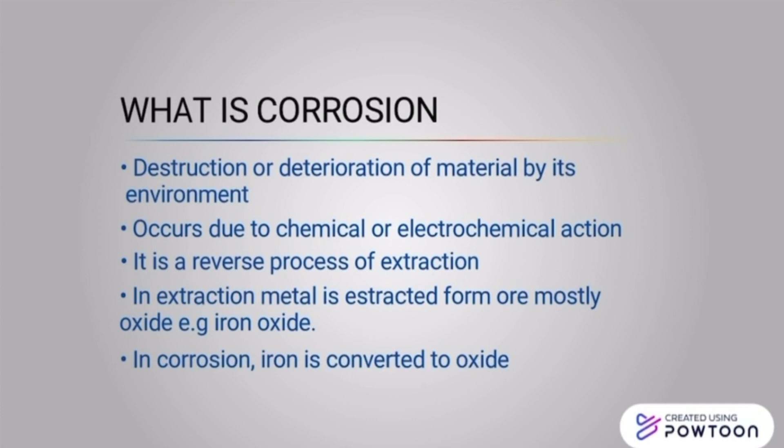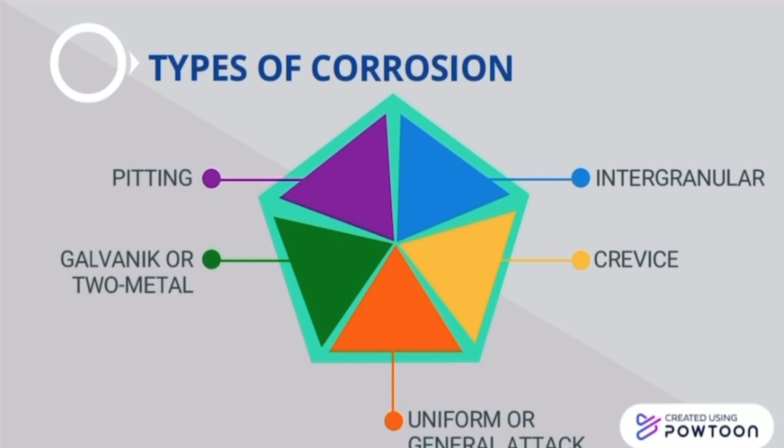Corrosion has 10 types: pitting, galvanic or two-metal, uniform or general attack, crevice, intergranular, cavitation, fretting, selective leaching or dealloying, erosion, and stress corrosion.

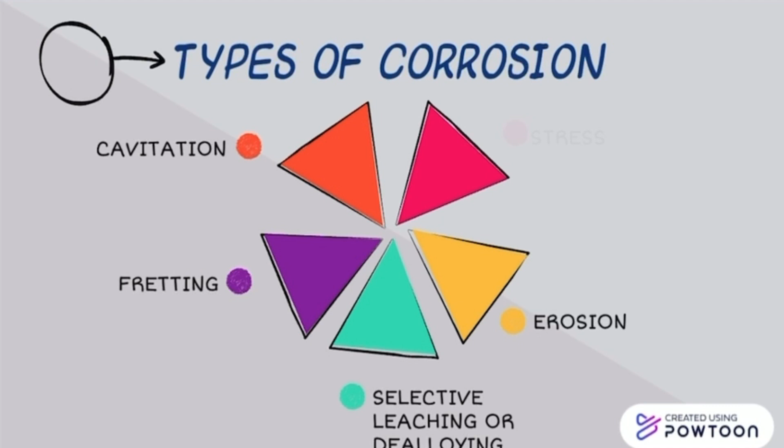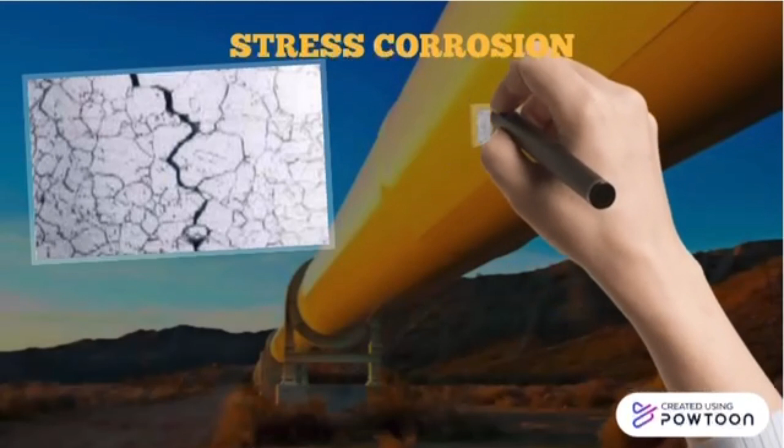Now we move to the main topic. What means stress corrosion? Here are the examples of stress corrosion.

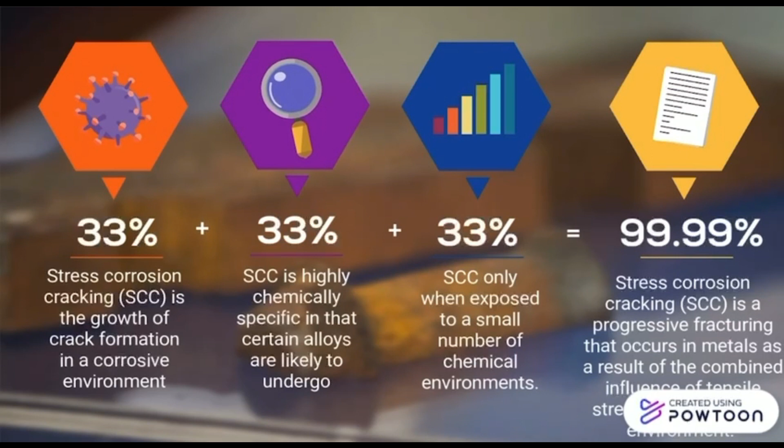Stress corrosion cracking is a growth of crack formation in a corrosive environment. It is highly chemical-specific; certain alloys are likely to undergo stress corrosion cracking when exposed to a small number of chemical environments. This makes stress corrosion cracking a progressive fracturing that occurs in metals as a result of the combined influence of tensile stress and a corrosive environment.

These are the elements of stress corrosion cracking: environment, material, and stress. In environment, we have aqueous corrosion and high temperature oxidation. In material, we have fracture fatigue. In stress, we can see stress-induced adsorption, surface energy effects, and nanomechanics. These are the three elements for making stress corrosion cracking.

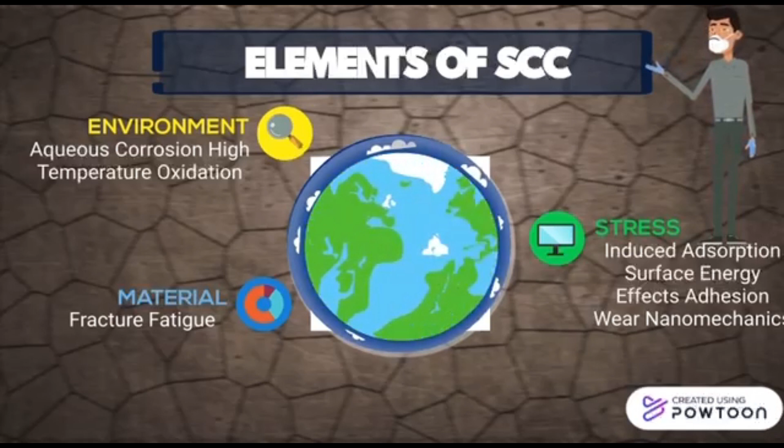Stress corrosion happens due to three factors: the first is tensile stress, the second is a localized zone that is chemically active, and the last is formation of crack and propagation.

Stress corrosion occurs due to tensile stress, applied stress and residual stress on the susceptible material in the presence of a specific corrosive environment, resulting in the formation of a crack which propagates. Stress corrosion cracking is a failure mechanism caused by environment, susceptible material, and tensile stress. Temperature is a significant environmental factor affecting cracking.

There are three common features of stress corrosion cracking related to our daily life. First, failure of metal resulting from joint action of stress and chemical attack. Second, initiation and propagation of a crack without any outside evidence of corrosion. Third, sudden and unpredictable failure, such as a catastrophic failure on a ship.

Causes of SCC. There are three main causes of SCC. First, susceptible material. Stress corrosion cracking can be caused by the type of material being used, because different materials are more or less susceptible to stress corrosion cracking than others. Poor material selection can lead to SCC due to the material being susceptible to it in the corrosive environment that it is operating in.

Second, corrosion environment. The service environment that the material is operating within can contain chemical species which cause stress corrosion cracking to occur in different materials. As a rule, material and environment selection should be considered together to avoid stress corrosion cracking.

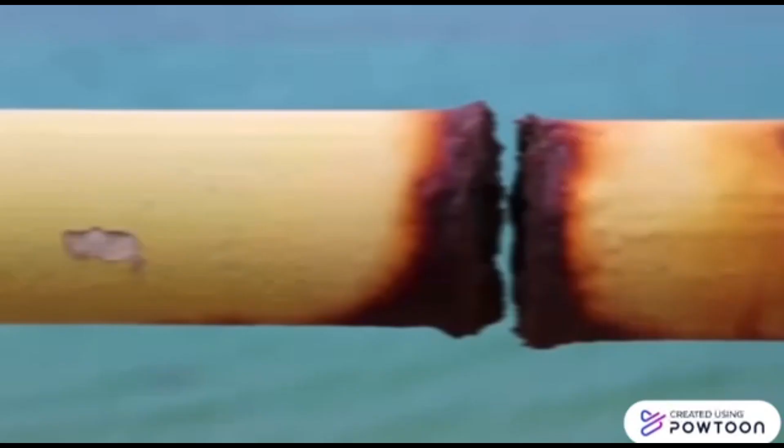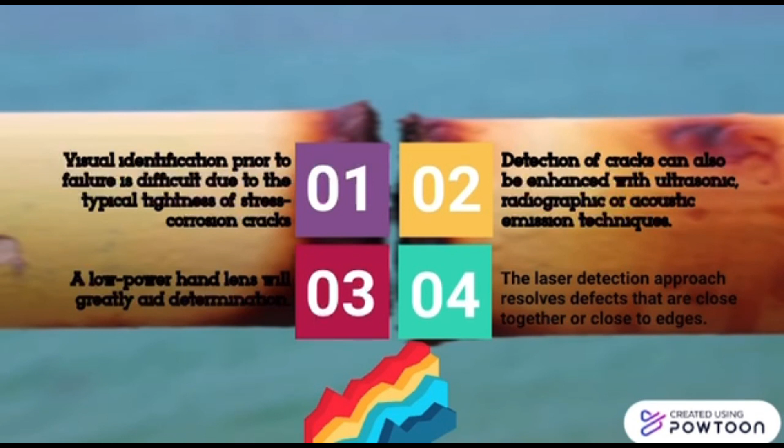How to identify SCC? Visual identification prior to failure is difficult due to the typical tightness of the stress corrosion crack. A low power hand lens will greatly aid determination. Detection of the crack can also be enhanced with ultrasonic, radiographic or acoustic emission technique.

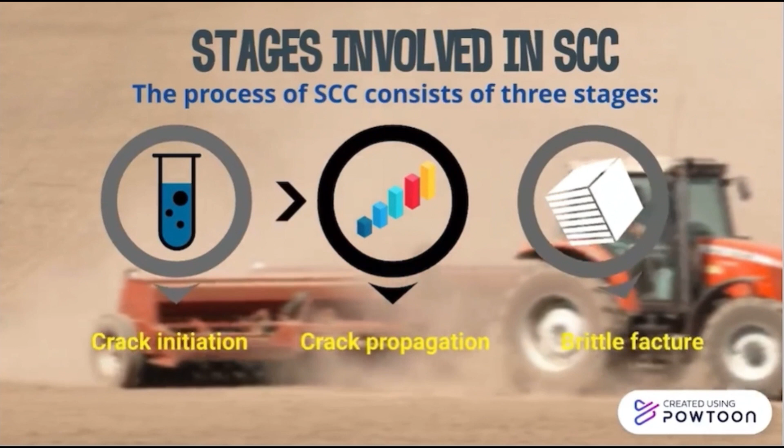Stress corrosion cracking is a delayed failure process. Cracks initiate and propagate at a slow rate until the stresses in the remaining ligament of metal exceed the fracture strength. The sequence of events involved in the SCC process is usually divided into three stages: crack initiation, crack propagation, and brittle fracture.

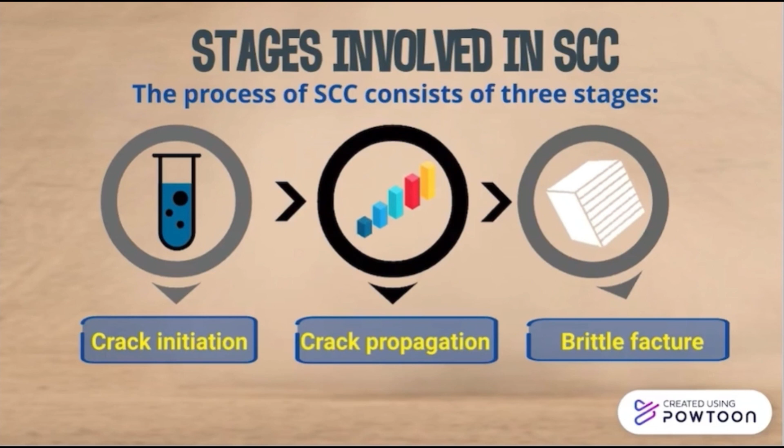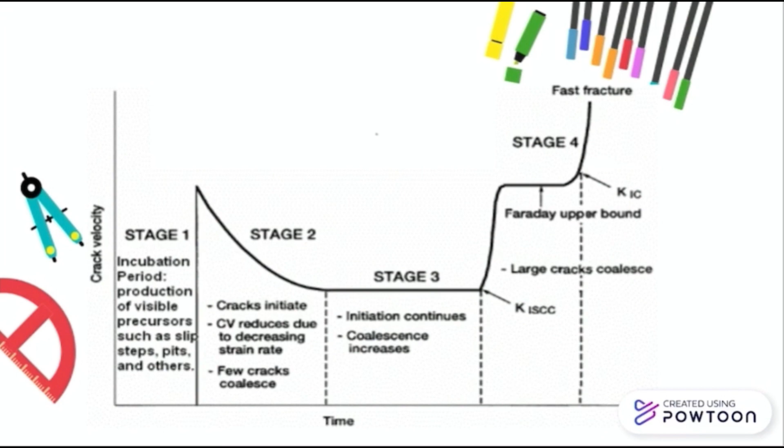Mechanism of stress corrosion cracking. The first one is the adsorption model. Specific chemical species adsorb on the crack surface and lower the fracture stress.

The next one is film rupture and pre-existing active path model. And the last one is embrittlement model.

It's like hydrogen embrittlement. Hydrogen is a special case because it's a small molecule, as we all know. So it dissolves in almost all metals, and most of all it can easily diffuse between the metal atoms in the crystal lattice.

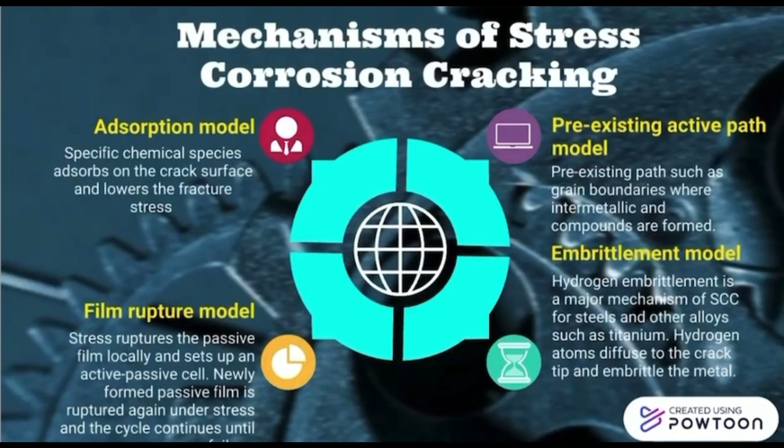Mechanism of stress corrosion cracking: pre-existing active path mechanism. Active path failure due to stress corrosion cracking is characterized by the progression of corrosion along an intergranular path of least resistance with high concentration of tensile stress. You can see the grain boundary and strain generate.

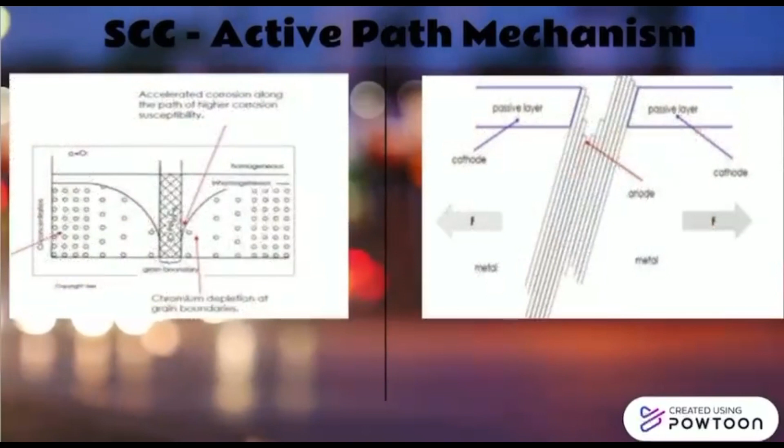For grain boundary precipitation, consequently, a form of galvanic corrosion can occur whereby the grain boundary corrodes while the specimen surface and crack walls remain passive. This process can occur in the absence of stress, giving rise to intergranular corrosion that is uniformly distributed over the specimen. The effect of applied stress is probably mainly to open up the cracks, allowing easy diffusion of corrosion products away from the crack tip and allowing the crack tip to corrode faster.

Strain generated active path mechanism. Strain is like a controlling influence, and strain generates it.

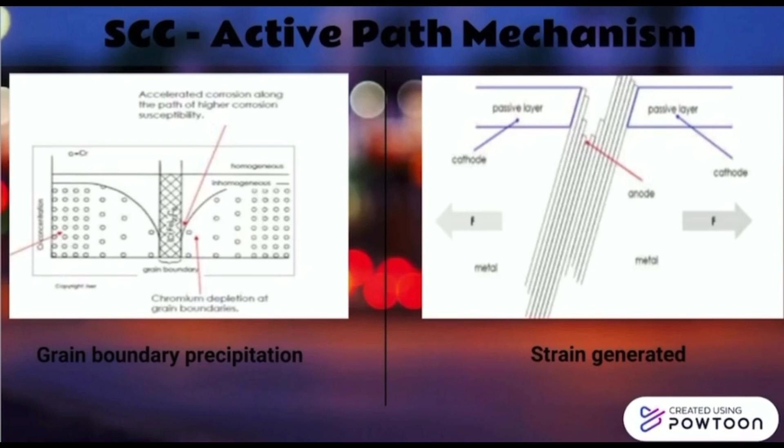Initially, a passivating film is formed on the metal surface. The film is ruptured by plastic strain, exposing bare metal. This film will form again and continue the process, making the crack propagate by successive dissolution at the crack tip. Emergence of slip steps is also considered to cause film rupture.

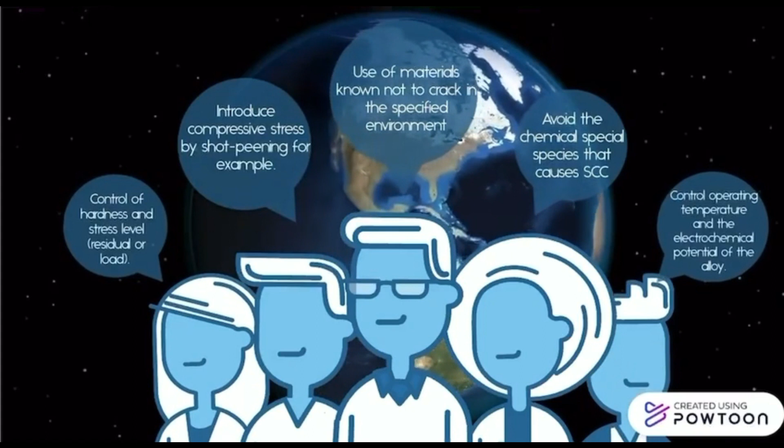First of all, prevention of stress corrosion cracking: introduce compressive stress by shot peening, for example. Use materials known not to crack in the specified environment. Avoid the chemical species that cause SCC.

Next, control the operating temperature and the electrochemical potential of the alloy. Control hardness and stress level, residual or load.

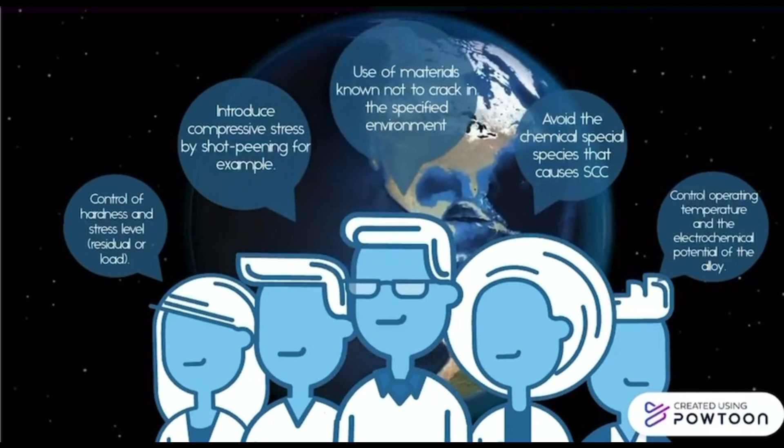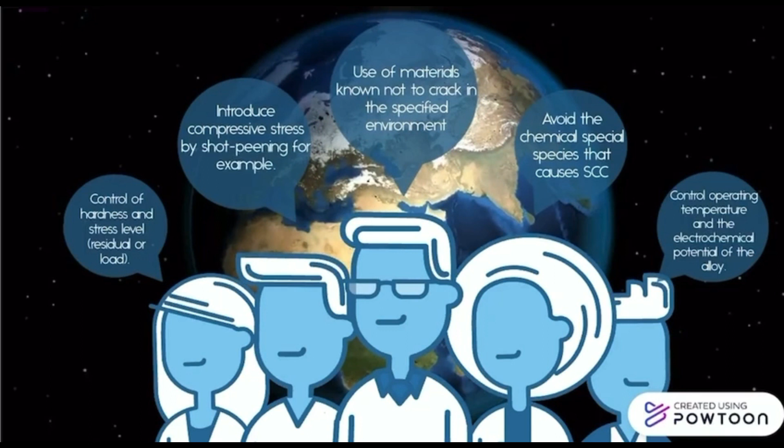Next, material: one of the main prevention methods involves using a non-susceptible material. This is an important way of controlling SCC as it prevents this form of corrosion from occurring in the service environment that the material is operating in.

However, this prevention method is not always an option, so it may be more applicable to control the service environment that the material is required to operate in.

Besides, environment is a major effect also. Another preventive method involves mitigating the service environment by removing, limiting, or replacing the relevant corrosive chemical species. This prevents stress corrosion cracking from occurring.

However, this can be a very difficult factor to control if corrosive species are naturally present in the environment where the material is located. For example, austenitic stainless steel in seawater.

Other methods of prevention include controlling the temperature to ensure that it does not exceed a certain level, including fluctuations.

Moreover, stress and strain: removing or reducing the tensile stress placed on a component is another way of preventing the occurrence of stress corrosion cracking.

One of the main downsides of this preventive method is that it can be difficult to control the stress that a material experiences at regions where stress can concentrate during fabrication or operation.

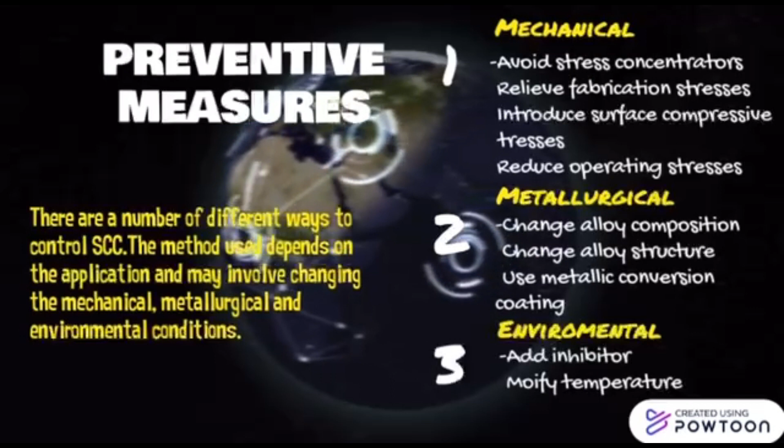There are a number of different preventive measures to control SCC. The method used depends on the application and may involve changing the mechanical, metallurgical, and environmental conditions. Mechanical.

Avoid stress concentrators, relieve fabrication stresses, introduce surface compressive stresses, reduce operating stresses.

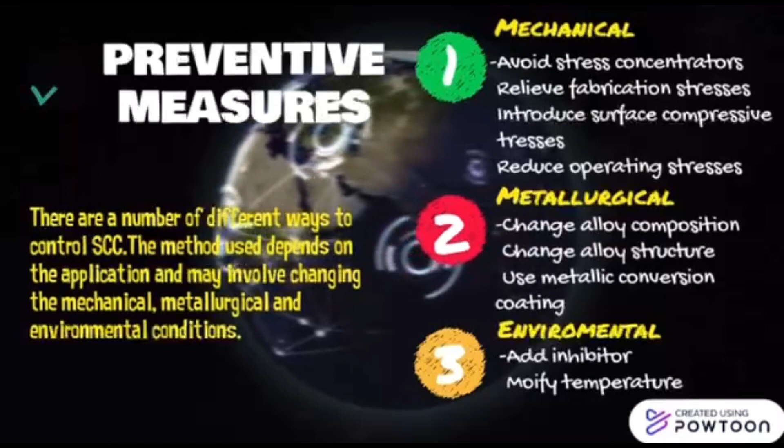The second factor is metallurgical: change alloy composition, change alloy structure, use metallic conversion coating.

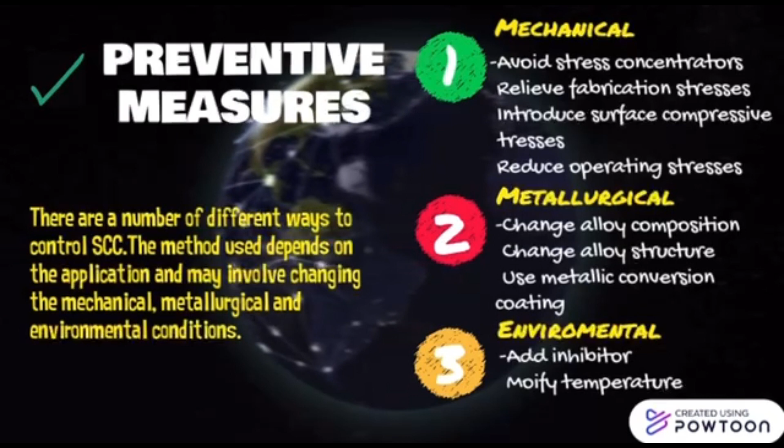The last factor is environmental: add inhibitor, modify temperature. In conclusion, many materials, particularly high-strength materials, are susceptible to stress corrosion cracking when exposed to a specific environment.

For example, cold-worked brass, which is found in ammunition cartridges, is susceptible to stress corrosion cracking when exposed to an environment containing ammonia. In chloride-containing environments, titanium alloys, aluminum alloys, and high-strength stainless steel are susceptible, and specified alloys resistant to stress corrosion cracking should be used.

The stresses required to initiate and propagate cracking are often low, and many failures occur due to residual stresses rather than applied stress.